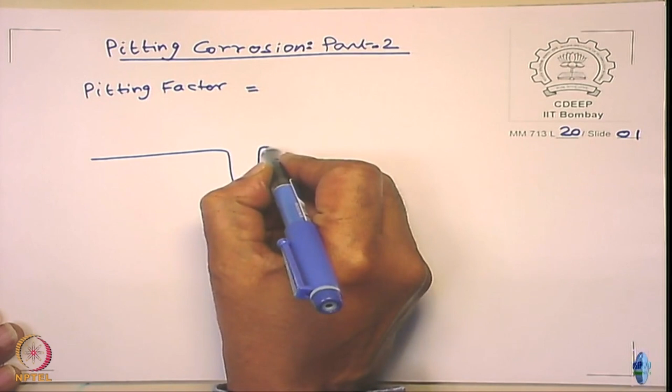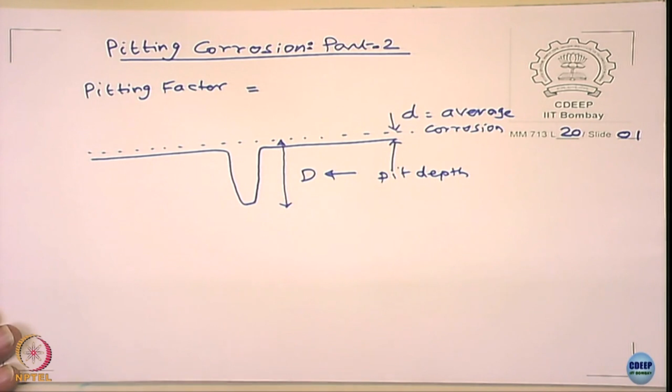The pitting factor is given by, and before I do this, I draw this diagram of corrosion leading to pitting. This is a pit you see here, and there is also uniform corrosion occurring on the metal. This is the average corrosion depth, d. Uniform corrosion you may call it. And this is the depth over which the pit has occurred, D. This is the pit depth. Now the pitting factor is given as D upon d. So it should be greater than 1.

Then you call it pitting. If it is not greater than 1, you do not call it pitting. The other way of defining pitting is the depth of a pit upon the radius. When I say radius, it is a gross radius.

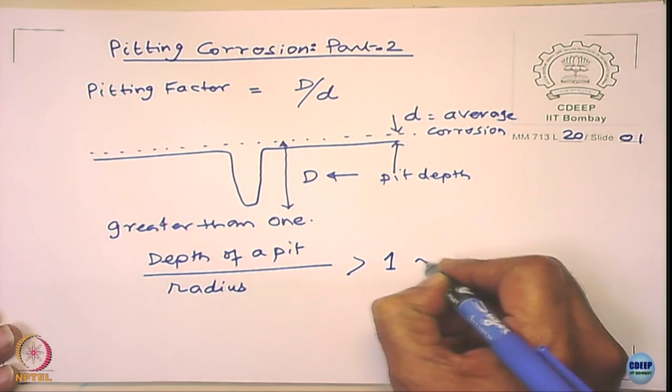You are not going to have a perfect circle, right? Perfect hemispherical, this thing. I think some people define it should be greater than 1, some people call it 2. So if you have a very shallow kind of thing, then it is not a pit. Now this makes sense, right?

If the pit radius is very large and the depth of the pit is very small, what happens? Can you connect it to the mechanism? It is not crevice corrosion. The migration becomes much easier, right? It is no more diffusion control and you can subject it to convection, right? If it is so shallow, the metal will just get out of the pit. It will not sustain a pit chemistry, right? So this is to sustain a pit chemistry, so that the pit becomes very stable.

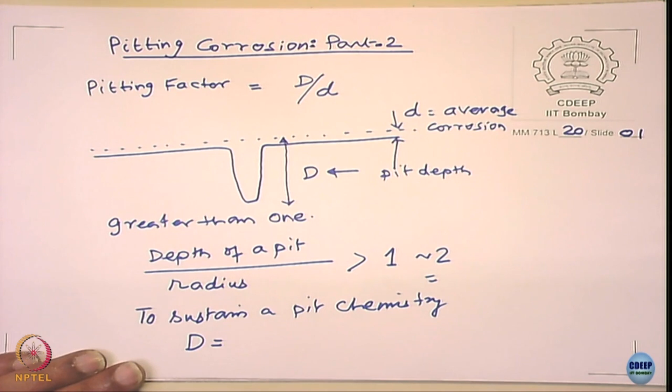People also have been following the pitting kinetics of various metals, and some people have come to this kind of relationship: the pit depth d is related to K times T to the cube root. D means the depth of the pit, right, and K depends upon the environment.

Please understand, this is related to growth rate, it is not related to pit initiation. The pit initiation may take weeks, it may take a month, it may take a year, whatever, but this only talks about the pit growth, it does not talk about pit initiation. What is T here? The T corresponds to the time of exposure.

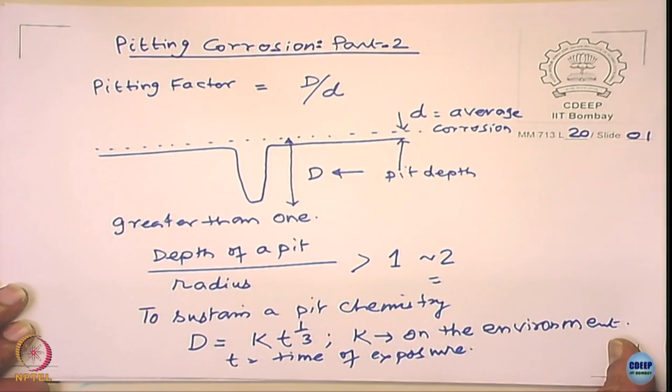It is necessary to understand that a pit is not only one shape, you can have complex shapes, you can have different morphologies of the pits. So it is necessary to recognize that. So we see that there can be different morphologies of the pit, and if you want to know more details, you can look at the standard ASTM G46. It talks about identification and examination of the pits. It talks about various pit morphologies.

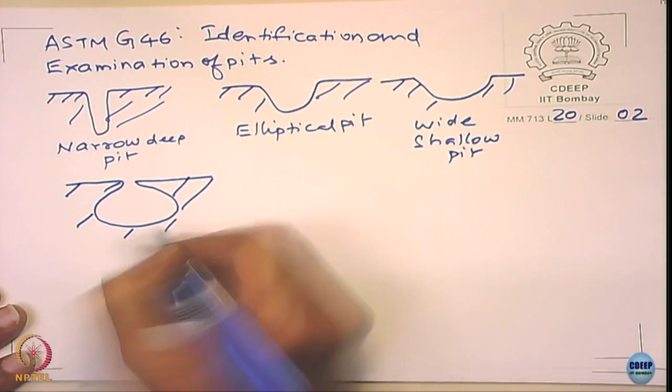I just reproduce some of them here schematically, right. You will have what is called a narrow, deep pit. You can have an elliptical pit. You can also have a wide, shallow pit. You can have pits which are subsurface. You see here, it just undercuts, just subsurface pits.

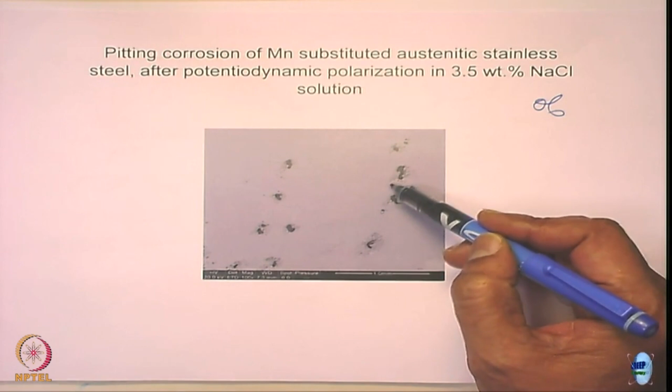Internally it grows like that, and there are some. Let me see if I have some photos. Yeah, there are some examples of how it goes. I suppose you will be able to see this. This is a pit here, and the pit has grown sideways, and from the bottom it starts corroding up, and so you see the pits here, very fine pits. So you see a small corrosion, and there is a lateral corrosion taking place, right, and from the bottom it just starts corroding, ultimately leading to this kind of morphologies. You see, this kind of thing could happen in the systems.

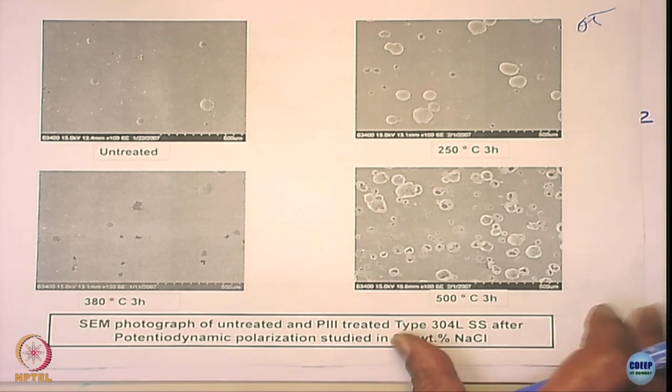You also see similar things here. These are all corroded and then lifted. See, this is about to lift here, just about to lift here. So these are the portions, I hope you are able to see this here. Look at this, it is corroded from the bottom and moves up and then it just goes away. So you can have very complicated pit morphologies, it can happen. You can also have sometimes very strange undercutting, something like that.

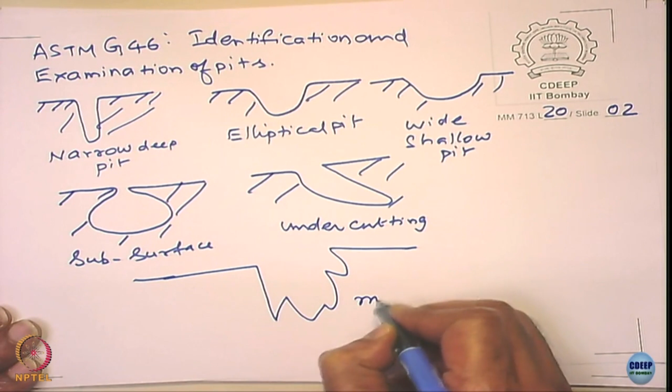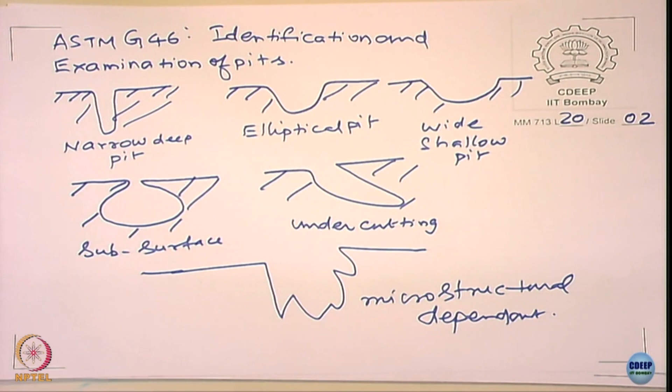So you can have nice hemispherical pits and you can have complex shaped pits depending upon the alloy, because an alloy is not homogeneous all the time. It could be chemically heterogeneous, and so there can be uneven types of corrosion morphologies for pits. Now, let us look at the factors that control pitting corrosion, because if you understand the factors controlling pitting corrosion, then you are able to prevent pitting corrosion. Broadly, I would like to say that there are two kinds of factors, one related to the environment, and the second one related more to the metallurgy. Let us look at these factors briefly. Let us look at the environment.

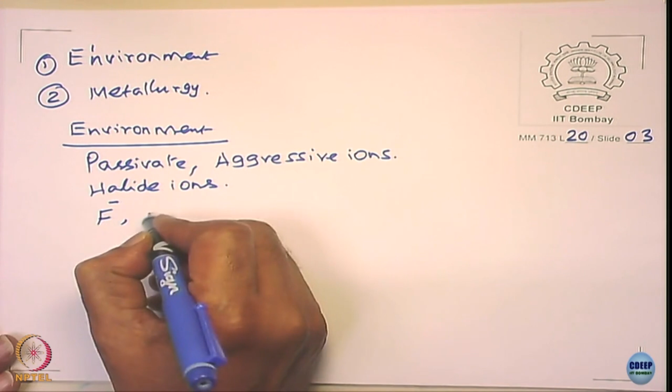We have seen the condition is you should passivate, right. Should have aggressive ions. Mostly the halide ions are considered to be aggressive. What are these halide ions? Anybody remember? What are they? They are fluorides, chlorides, bromides, and iodides.

When it comes to stainless steels, the most aggressive is chloride, next is bromide, and the fluoride and iodide, they are not really that aggressive. Okay. Now, broadly speaking, I would say, okay, not really actually, one can verify all these parameters.

Fluoride, see, if you have a passive film, if the passive film has to get damaged by these ions, the ions have to migrate in the passive films, right. They have to migrate and then form a complex. The migration depends upon what? The radius of the ions. If the radius of the ions is too big, then migration becomes very difficult. So if you take it that way, fluoride ionic radius should be smallest as compared to chloride and bromide and iodide, but even then the fluoride does not cause severe pitting as compared to chloride for two reasons.

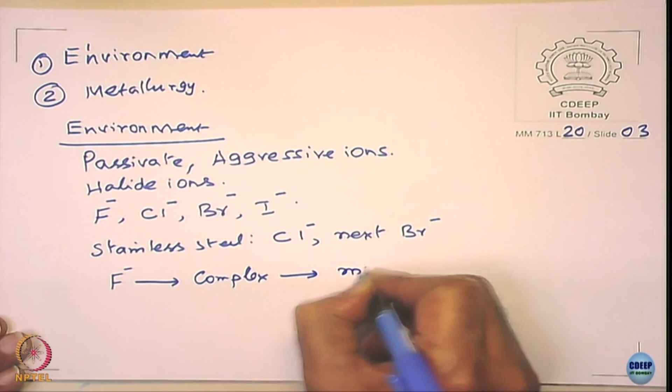One, the fluoride forms complex and so promotes more uniform dissolution. The second reason is the fluoride forms strong hydrated layers.

See, these ions in water are not very free, they are hydrated. The water molecules, I mean these ions are enveloped by the water molecules. Even if you take H plus ion, they are not free. H plus ions are covered with what? Covered with water molecules. Why? Water is a polar molecule, it has got a positive charge and negative charge, and so they get enveloped.

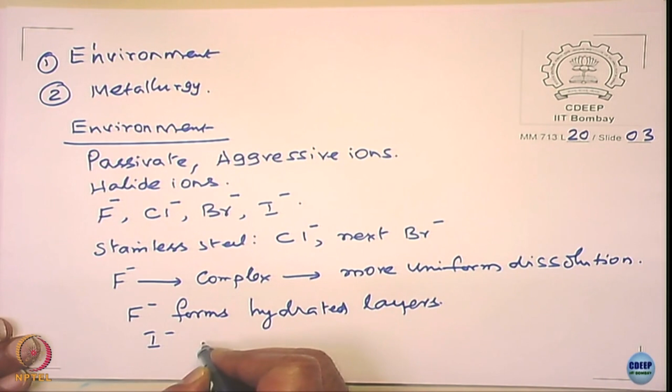So when you have a fluoride, it is getting hydrated, it's very strongly hydrated, then you do not allow the water to come out and free the fluoride ions, because to remove the water molecule from the fluoride ions is more difficult because the charge density is more on fluoride as compared to the chloride. So the two reasons make the fluorides less aggressive towards pitting as compared to the chlorides. And iodide is the largest radius. So it does not pit. Does not cause pitting rather actually, okay.

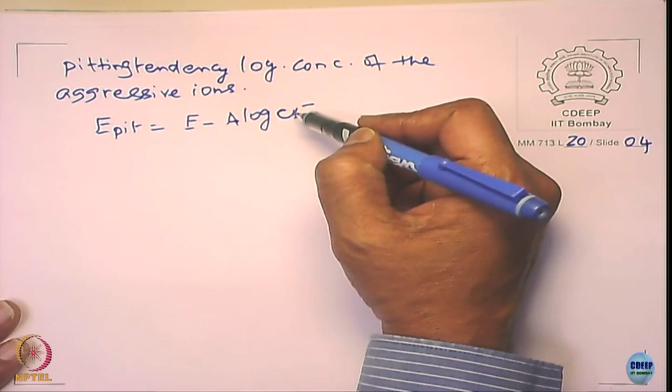Now there is a kind of empirical or thumb rule that the pitting tendency is logarithmically related to the concentration of the aggressive ions. Something like you can say E pit is equal to E minus A log chloride. So the E pit will decrease if you increase the chloride ion concentrations. A, this factor depends upon the nature of the aggressive ions. So higher the concentration of chlorides, the more susceptible they are towards pitting.

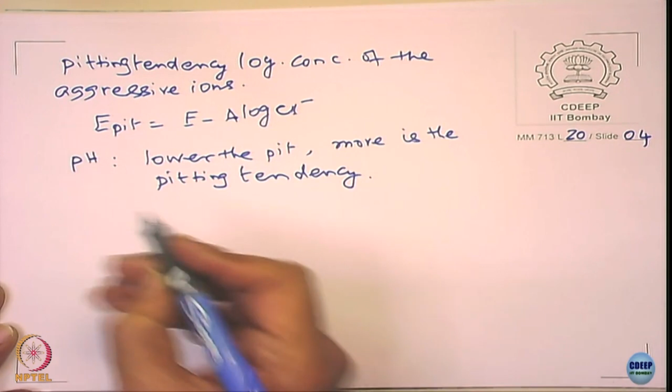It also depends upon the pH. Okay, lower the pH, more is the pitting tendency. What happens now, it's easy for the pit to stabilize in an acidic pH, right? You have H plus ions in the solution. You also have one more thing, that is the nature of the cations.

Can you remember some time back I gave an empirical relationship that E pit is a function of what? Function of chlorides, time, and of course the applied potentials, right. The pitting tendency, I said that is a function of applied potentials, concentration of the species, and time of immersion, right. Now, when I add ferric chloride, what happens? What do you think will happen? Any idea?

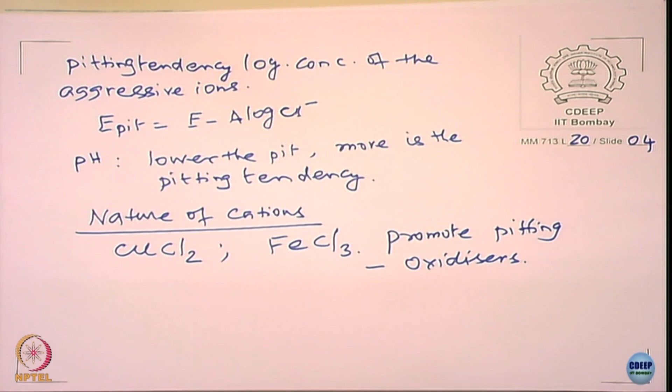On the other hand, suppose I add, let us say, sodium chloride or nickel chloride, they are not really going to change the electrode potential of the corroding metal. They may not have very significant effect on pitting corrosion.

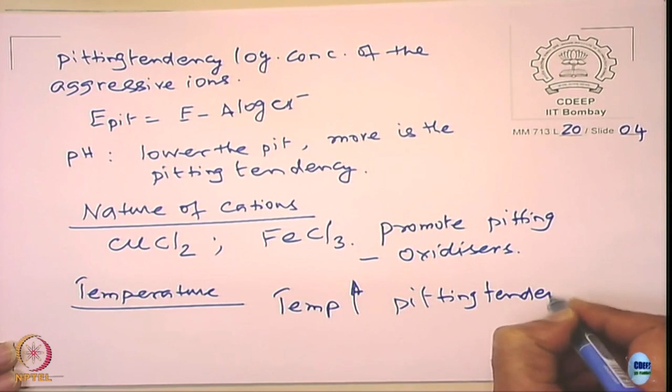So, what about the temperatures? What do you think will happen to pitting corrosion when the temperature increases? Diffusion will become faster, what more can happen actually? That is only one aspect of it. What also happens to the dissolution of the metal ion at the pit? Increase, right? So, when the temperature is increased, pitting tendency also increases. In fact, they also make some of the salts, formation of salts, and then it stabilizes the lower pH and stabilizes the chlorides. So, rise in temperature is always detrimental towards pitting corrosion.

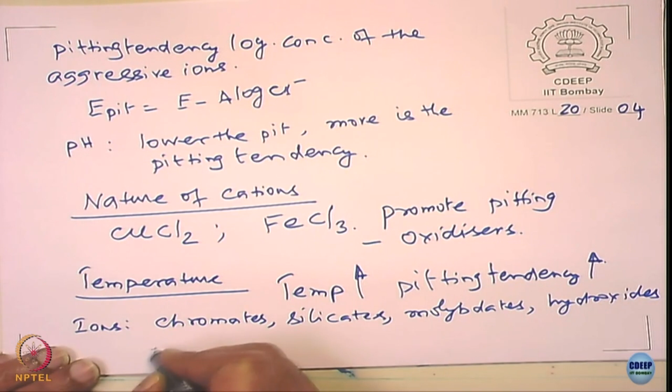Now, some of these ions, say chromates, silicates, molybdates, and even hydroxides, they inhibit pitting corrosion. In fact, for aluminum alloys, to improve the pitting tendency, they give conversion coatings. They give conversion coating with chromates. Okay, the chromates indeed promote resistance against pitting corrosion of aluminum alloys.

Let us look at the metallurgy. Here we are not going to look at a host of materials, say titanium undergoes pitting and almost all passive metals will undergo pitting, given the conditions. So we will just confine mostly towards stainless steels, very broadly used actually. So let us look at the metallurgical aspect of it. When I say metallurgy, we say the composition, one aspect, 2, the microstructure, right. You can also talk about the surface nature. It is not really metallurgy that way, surface nature. Now let us take the case of stainless steels and discuss these aspects in detail, because stainless steels are very widely used and they are prone to pitting corrosion.

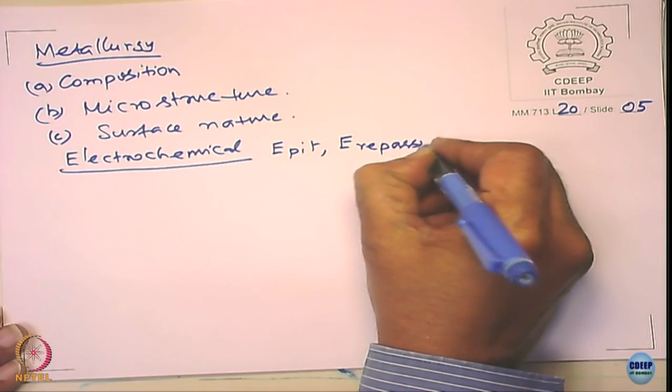Now the pitting tendency of the metal you could define by some electrochemical parameters, right. What are the parameters? Anybody recollect? What are the parameters that you can use to measure the relative resistance of an alloy to pitting? Pitting potential. Pitting potentials. And the other one is called repassivation potentials. Now let us look at how various alloying elements affect these two properties.

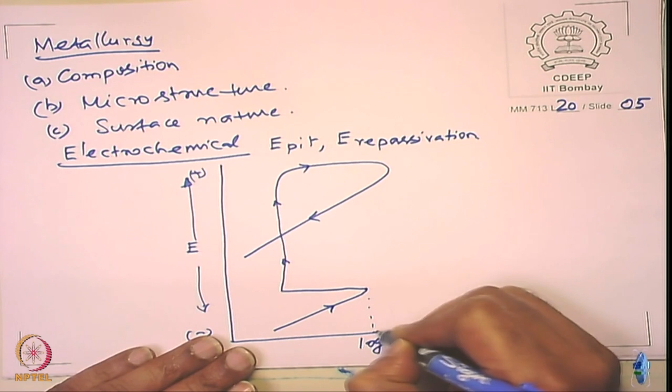So schematically, this is the forward scan, backward scan, right. From the corrosion potential, you raise the potential, and what is this called? This is called, what do you call this current density? I critical, critical current density. And what is this called? I passive. And what is this one? E pit. And this is called E repassivation potential.

Now let us look at the elements that can affect this. The elements that move up the E pit are going to improve the pitting resistance of the stainless steels. So what are these elements? These elements are chromium, molybdenum, nitrogen, tungsten, silicon, vanadium and nickel. So these elements, they increase the pitting potentials. So when you increase the pitting potential, that means the initiation tendency of the metal to pit is reduced. What about this? If it goes up, it is good. This is called repassivation potential.

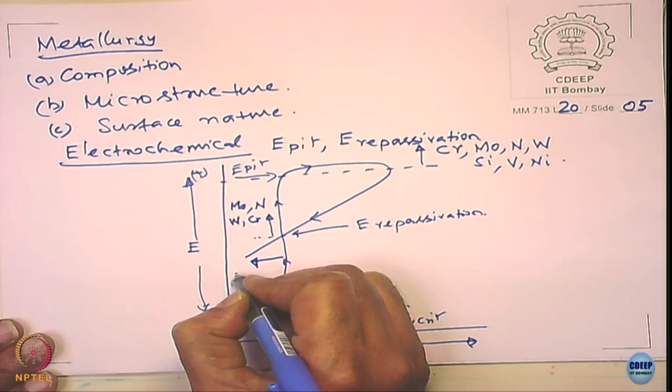If it goes up, these things you have molybdenum, nitrogen, tungsten and chromium. Of course, you want to know about the passive current density, whether you want this to be reduced or not. The passive current density is reduced by these elements: chromium, nickel, tungsten and nitrogen to a certain extent. And you want to know about this one, what is this potential called? E primary passive potential, right. What are the factors that affect this? See, nickel is not good, it increases, and so does copper, it increases. Which ones decrease this I critical? Now these elements like chromium, nickel, vanadium, moly and nitrogen. So in fact this forms a basis for development of various types of stainless steels, which are resistant to corrosion in general, pitting corrosion in particular, crevice corrosion in particular, and this forms the basis of that.

Of course, you cannot keep adding the way you want. Suppose I take an austenitic stainless steel, I want to increase the pitting resistance, I cannot keep adding so much chromium, right. If you add it, what happens? The austenitic phase will turn into a ferritic phase. So then you need to make a phase balance, so you need to add nickel to it, right. So the alloy development is a different story altogether, but the corrosion resistance story depends on this diagram, and in order to get different phases you compensate with the relevant alloying elements. So that is a different story of physical metallurgy of stainless steels, we will not be discussing over here.

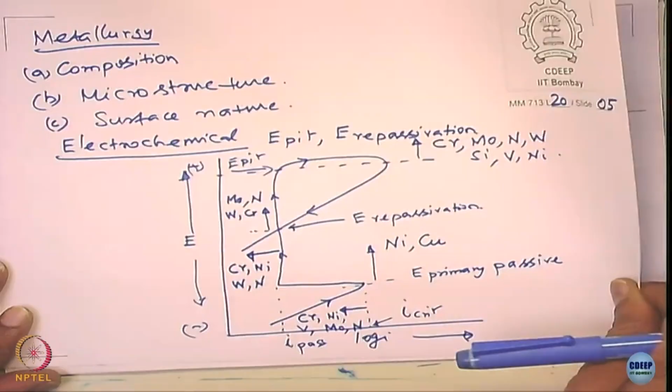Now if you look at here, there is also an empirical equation to correlate alloy chemistry to pitting corrosion, that is using PREN. It is an index which is given as percentage of chromium plus 3.3 times percentage of molybdenum, plus 0.5 of tungsten plus 16 times percentage of nitrogen. What is PREN? It is called the pitting resistance equivalent number.

Okay, and you can say that if PREN increases, pitting resistance increases. So for applications involving large amounts of chlorides, like seawater applications, stainless steels with a higher PREN are being developed. Some of them, in fact, are in use, okay.

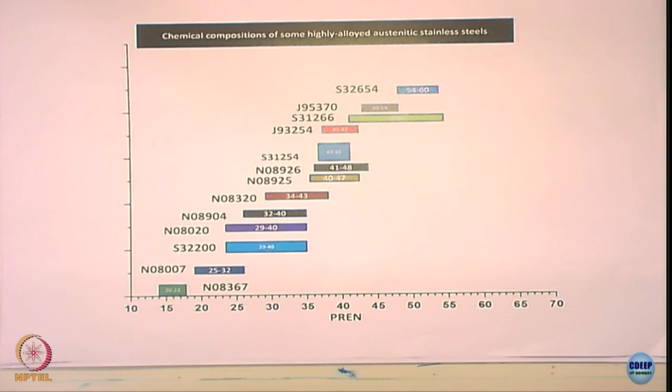Now I give some example here. I hope you are able to see this chart here. It represents various austenitic grade stainless steels. You can use this kind of thing for ferritic grades also. What is given here is the PREN number, starting from let us say 15 and going up to let us say 60, okay, and you see the stainless steels have been developed starting from here up to this, right.

This is called the 654 SMO, okay. This has 6 molybdenum, a higher amount of molybdenum is present here. Now you cannot add a high amount of molybdenum because it becomes a ferritic stabilizer, so people add more nickel to that. So this is also, you have 254 SMO, and 25 chromium you have actually, okay, and so various kinds of stainless steels are being developed

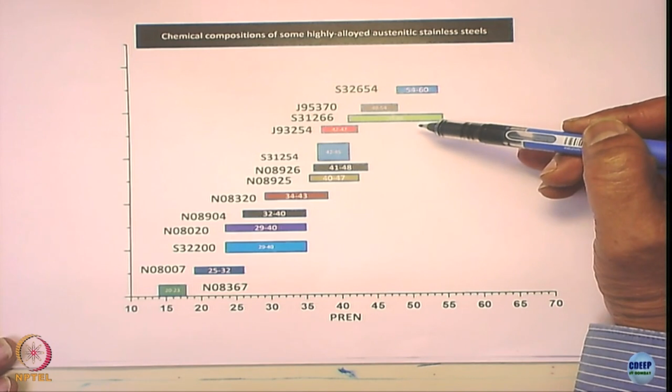in order to have higher pitting resistance, which means they do have a higher PREN number, but the cost of this is also going to go high, right. You have more nickel, more molybdenum, which really increases the cost. So that is one of the problems of using austenitic grade stainless steels. So what happened was that there is a variation of this. People use what are called duplex grade stainless steels. It's somewhere in between, and nickel based alloys also have very high pitting resistance. Now the cost of duplex stainless steels at high PREN number is lower compared to the cost of austenitic stainless steels at high PREN number.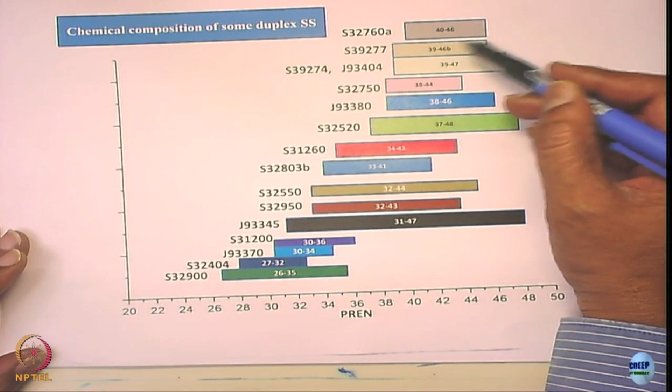The reason is very simple. The nickel content in duplex stainless steels is mostly lower compared to the nickel content in the austenitic grade stainless steels. So again there is a gradual growth of duplex stainless steels with low PREN number going up to 40, 46 and so on. Now look at this, duplex stainless steel can be used in seawater application where the chloride content is 3.5%. Similarly, you can also use 654 SMO, okay, but this material is prohibitively expensive compared to the duplex stainless steel here, okay.

So what I am trying to say is that the development of stainless steels was based on understanding the chemistry of the alloy towards the pitting corrosion of the metals actually. In all this, nitrogen plays a very significant role. Let me just see if I can show you some kind of curves here.

Let me show this polarization curve, okay. Essentially it's a 904L filler wire, you know what is called a cladding, right? What is a cladding? You melt and deposit. You can also deposit without melting, right? It's a layer, in this case 904L, formed on mild steel here, okay. This is done by welding, by weld cladding. So you melt it and apply on the mild steel, and it's 904L, okay.

So what happens? See, in this case the carbon steel, why do people go for cladding? Because you want higher corrosion resistance materials, you want a thick one, and it's very expensive, right. So you can go for a carbon steel or other steel having lower cost, go for a thicker component, and just deposit a clad layer of let us say 2 or 3 millimeters that takes care of the corrosion, and the basic substrate takes care of the strength characteristics, so it becomes cheaper.

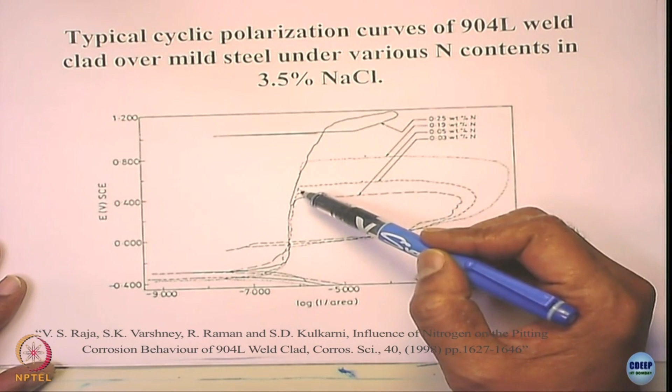Now we have done some work related to 904L, okay. Look at this here, it starts with this, the 904L without adding any nitrogen. When you start adding nitrogen further and further, you see what happens: the pitting potential increases and even the repassivation potential also increases. Now in this case the nitrogen content is 0.25. So when you add more nitrogen to the weld, the pitting resistance increases significantly. Please see here the weight percent is about 0.25% only, it's not too much.

So by adding this nitrogen you can increase pitting resistance, the E-pit value, from 400 millivolt up to 1.2 volt. In fact 1.2 volt means it is not pitting actually. If you look at the Pourbaix diagram, it will be the oxygen evolution reaction. Okay. So essentially this does not pit at all by just the addition of a small amount of nitrogen. So alloy development can be done to improve the pitting performance of stainless steels.

Pitting corrosion is also very widely studied from the mechanistic point of view. What I mean by that? When you add molybdenum or nitrogen, they are much more effective as compared to chromium actually. So people have studied why molybdenum is very effective, and why nitrogen is very effective, because there is no last word, right? Still there are multiple theories as to why molybdenum and nitrogen improve pitting resistance. I will just summarize a few of them and then move on to the next topic.

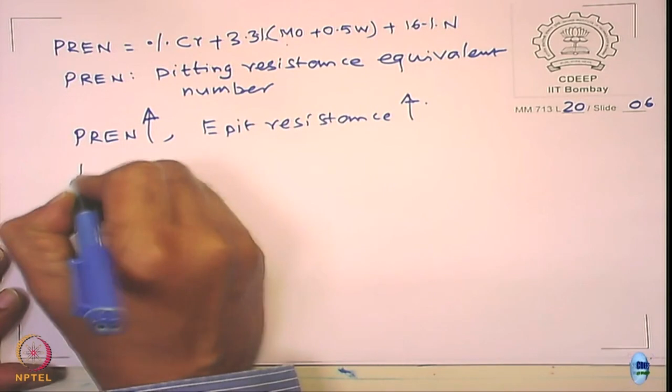The role of molybdenum has been, first of all, they say that molybdenum is not found in the passive film. It is found in the actively corroding areas. So suppose you have a pit, in the deep of the pit you can find molybdenum, or you keep the metal in the active region, and then you observe the surface will have more molybdenum. But in the passive region, the passive film, there is no molybdenum at all. So this led to some understanding that molybdenum blocks the active surfaces. One kind of hypothesis.

There is also another hypothesis which says that the corrosion rate decreases when H plus concentration increases. It is a very unique property of molybdenum actually, right? You saw before, when the pH of the environment decreases, what happens to corrosion rate? It increases, right? But molybdenum has different characteristics. When you increase the acid concentration, the corrosion rate of molybdenum decreases. This is called a negative reaction order. Suppose you have molybdenum on the surface, and you increase the acid concentration, it is not going to corrode. Why? Because molybdenum has a negative reaction rate order, and so this is considered as another factor.

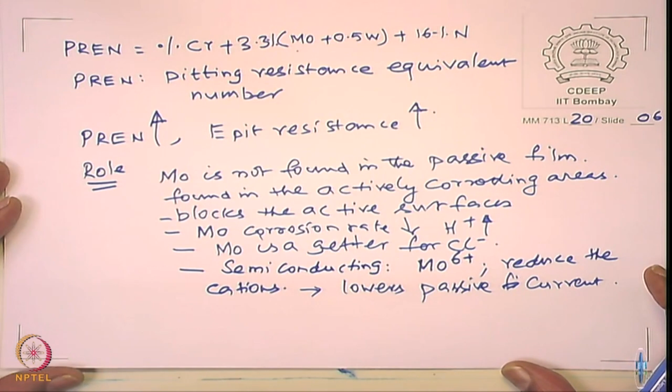There are also other theories that talk about semiconducting behavior. The passive film is considered as a semiconductor, right? It is like high temperature oxidation. You have an oxide film, it is considered as either rich in oxygen or less in oxygen, non-stoichiometric oxygen there, right? Then you have either p-type or n-type oxide conductors. So similarly, you can also consider the passive film as a semiconductor, and what happens when you add molybdenum, let us say in the 6 plus valency state? It will reduce the cations, right. When you add higher valent ions in the oxide, the cation concentration decreases to maintain electron neutrality, and so what happens? It lowers the passive current and makes it stable. So there are several theories available. I have given only a few of them, and there are some more theories. For this course we do not have to worry too much about the mechanism, just an outline of the mechanisms is okay.

Nitrogen has a similar role. About nitrogen, it is still not clear. Some people say it forms ammonia, that means it neutralizes. But what we have seen is that the active dissolution is reduced due to nitrogen in the alloy.

Now we also have the microstructures. Let us go to microstructures. Suppose you have some phases which are selectively corroding, like manganese sulfide, what happens? It lowers pitting resistance. They selectively dissolve, attack actually. So any phase which is prone to corrosion will promote the corrosion. Similarly, segregation of elements promotes pitting.

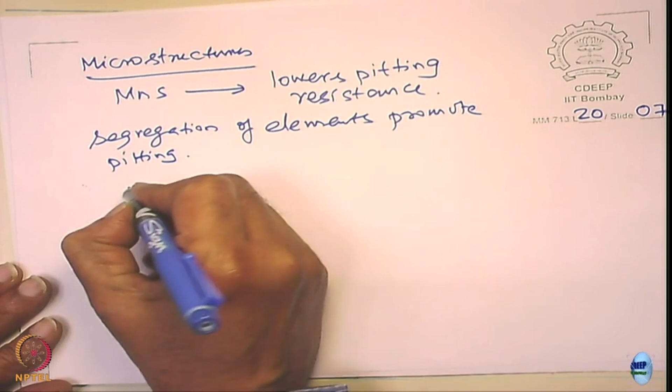I give an example. You weld it. What has happened to the material when you weld it? The weld fusion zone, what happens? Some of you are having a metallurgy background, right? When you weld by, let us say, fusion welding, TIG welding or MIG welding, you take a stainless steel and weld, what will happen? If you look at the microstructure, what do you see as the difference between the welded fusion zone and the base metal? I am talking about the fusion zone.

You take a nicely rolled wrought stainless steel sheet and you weld it, and the fusion zone, what do you get? What structure is that? Have you heard of a cast structure and wrought structure? What kind of structure will you have in a casting? Suppose you melt and pour it. What structure do you get in a casting? Dendritic structure. You see, they are very simple, right?

Normally all your stainless steel, you have a molten liquid, pour it, and then they do hot rolling and then anneal it out, they make it chemically homogeneous. But when you weld it, you are going to have elements which segregate. Of course, we do not have time to discuss those issues. The welds will have chemical segregations, like segregation of chromium, molybdenum and things like that. So, you have some place which is enriched with chromium, some place it is depleted of chromium.

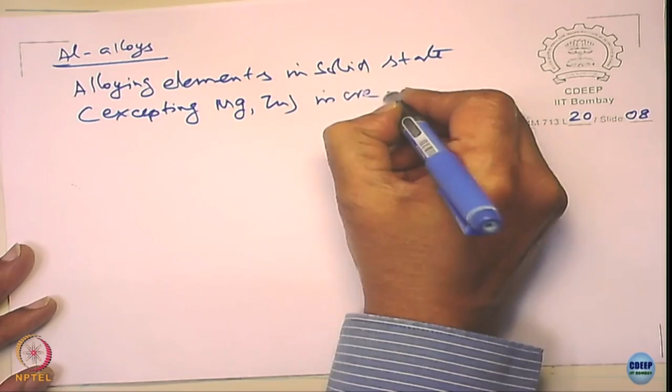The other example, let us say I just give a small example, is aluminum alloys. That is a very nice system to discuss, and how the pitting resistance of the aluminum alloys really changes. The aluminum, unlike stainless steel, will have multiple phases to have the strength, right. In aluminum alloys, alloying elements in solid state, that is excepting magnesium and zinc, increase EPIT.

So, they are generally good, but you do not make aluminum alloys generally with the elements in the solid solution. You always want to have precipitates to increase the strength performance actually, but from a scientific point of view, you can add so many elements like molybdenum, tungsten, chromium and a host of elements. If you can put them in the solid solution, you will find a very significant improvement in the pitting resistance of these alloys actually.

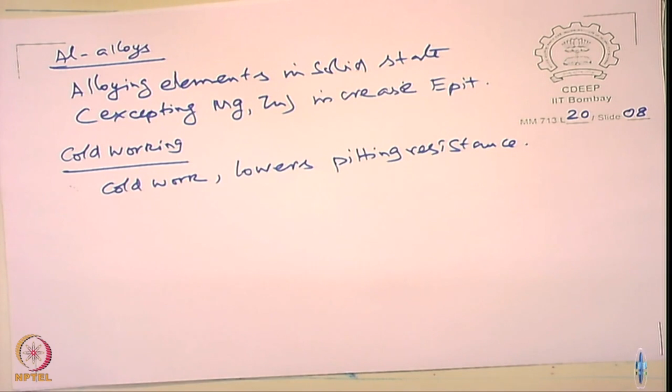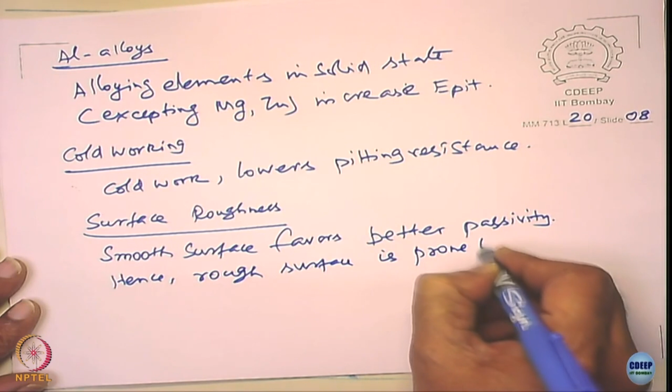Okay. Let us look at the other one, metallurgy, cold working. Generally cold work, what happens? It lowers resistance. Why? It introduces dislocations, and so there will be more corrosion. Surface roughness, okay. Smooth surface favors better passivity. Hence, rough surface is prone to pitting. So, if you do electro polishing and make it mirror like, you have excellent resistance to pitting actually.

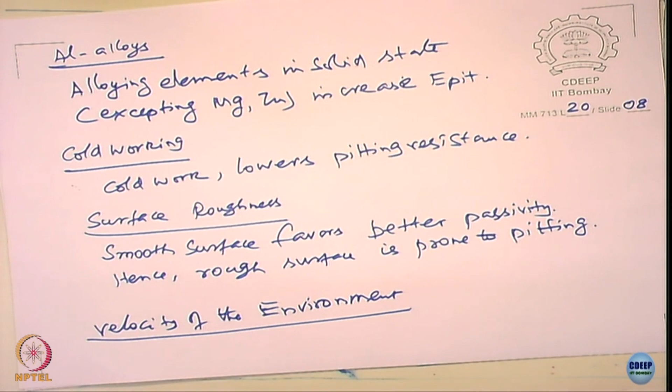One of the external factors, not related to metallurgy, is velocity of the environment. So, what do you think will happen to pitting corrosion? You have a stagnant condition, you have a flow condition, what will happen to pitting corrosion? Pitting resistance will increase, okay. Why does it increase? Because it will destabilize the pit chemistry, right? The pit chemistry is destabilized. Hence it increases pitting resistance.

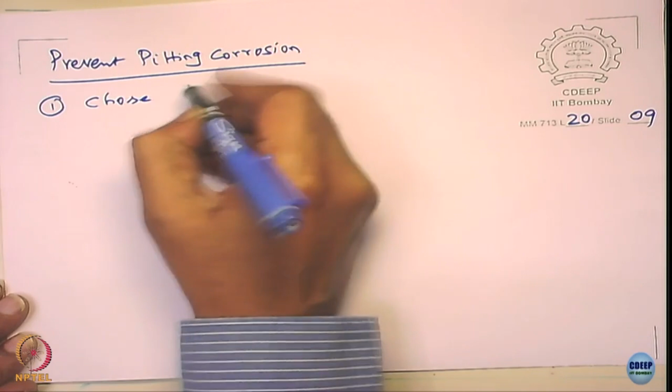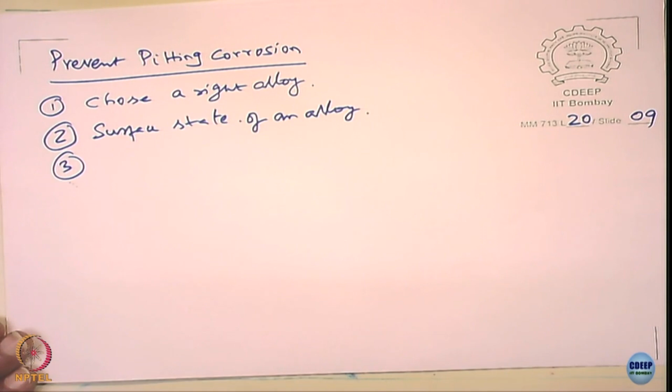So we have seen overall the factors that are controlling the pitting corrosion. Then it must be easy for you to suggest methods to prevent pitting corrosion. How do I avoid pitting corrosion? Quickly, yeah. So you can choose a right alloy. Or you can change the surface state. To some extent, it is not going to be okay for long run, but yes, it is good. Third, environment change where possible.

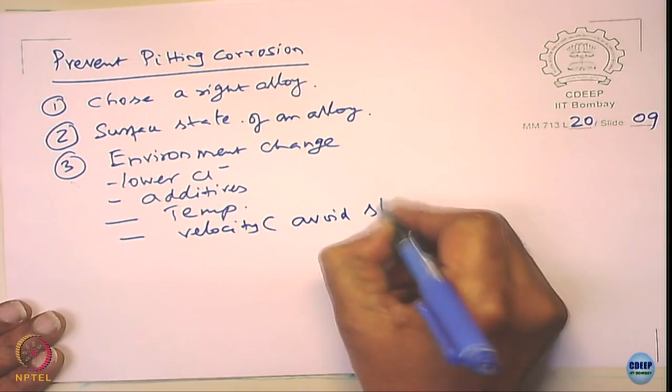If you are going to apply a material for seawater application, obviously you have to choose a right alloy, right? You cannot really do much about it. But if you are talking about a cooling water system or a boiler water system, you can change the environment, right? You can lower chlorides, add additives, change the temperatures. Then velocity, that means avoid stagnancy, right? If you are going to talk about seawater application, one of the very robust alloy systems is what? Titanium, right? Titanium forms a very strong passive film, and so it is more resistant to pitting corrosion. You have of course tantalum, the ultimate in terms of corrosion resistance and pitting resistance.

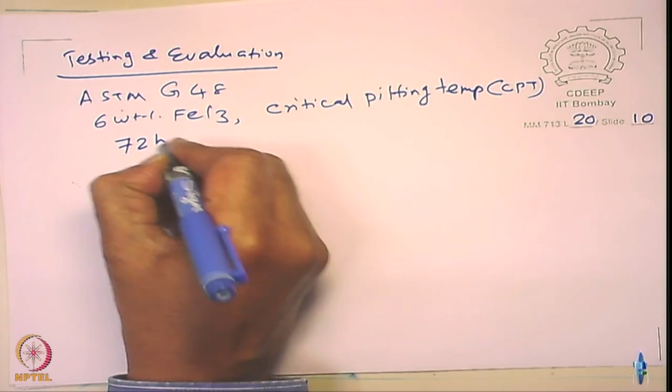Okay, so let us go to the last topic of this, which is testing and evaluation. There are ASTM standards for that, you can look at them. In ASTM G48, this talks about the 6% ferric chloride solution. It determines the critical pitting temperature. What you do in this case is you immerse it for about 72 hours, maintain the temperature plus or minus 2 degrees accurate, and find out the highest temperature below which no pitting occurs. That is called the critical pitting temperature.

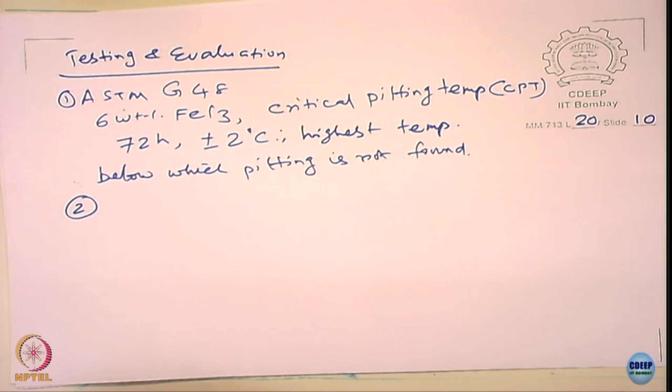Pitting is not found. The second one is also ASTM G61. It is cyclic polarization. What you do here, you determine E pit, you determine the E repassivation potentials essentially, right.

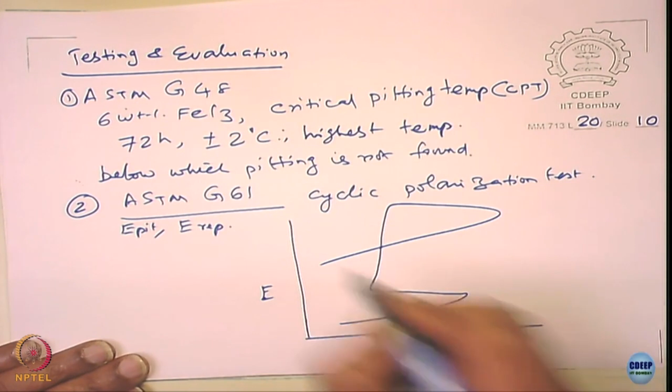I am not going to give you all these details, you can read this in the standard, it is available in the library. I will tell you what is important here. One is the scan rate. Higher the scan rate, you get higher pit values. So you have to maintain the scan rate as stated in the standard, 0.6 volt per hour.

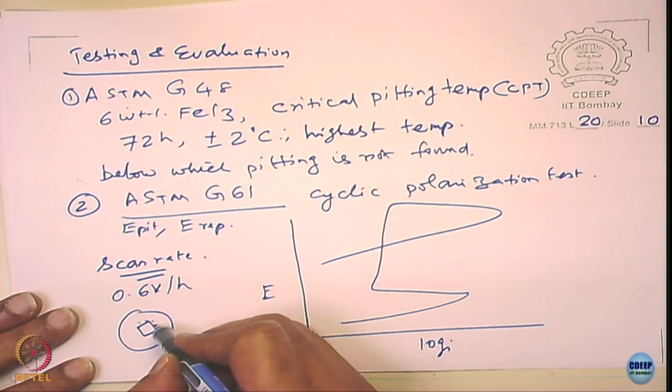There are some problems you normally encounter. If you do 0.6 volt per hour, sometimes you will get a crevice attack in the samples. You know, sample sometimes you mount it. You have a mount here, you keep the sample, and you may get a crevice attack. You must ensure that there is no crevice attack taking place. If there is a crevice attack, then E pit will be lower than the actual value. Why? Before pit occurs, the attack takes place along the interface here. So mounting the sample properly, ensuring that no attack occurs at the interface between the sample and the mount, is a very important thing.

In our lab, we apply a small bead of epoxy resin, so that the interface is protected. There are also special electrochemical cells available. I think we will not discuss that here. You can see them in the literature actually. What is more important is that this reversal current, what we talk about here, is 5 milliamperes per centimeter square.

Now, if this is not maintained, for example, if I just scan like that and reverse it here, you get like this. If, on the other hand, I reduce this current even more, I get like this. So this repassivation potential ERP, whatever you write here, depends not just on the material, it depends upon at what current density you are reversing the scan, right. I hope you will be able to understand why it takes place.

If you apply more current, the pit becomes deeper, it becomes difficult to repassivate. If the current is lower, the pit is shallow, it is easy to repassivate. So repassivation of the pit does not depend only on the metal, but also depends upon the depth of the pit. But what they have found here is, if you apply 5 milliamperes and above, it is not going to depend upon this current.

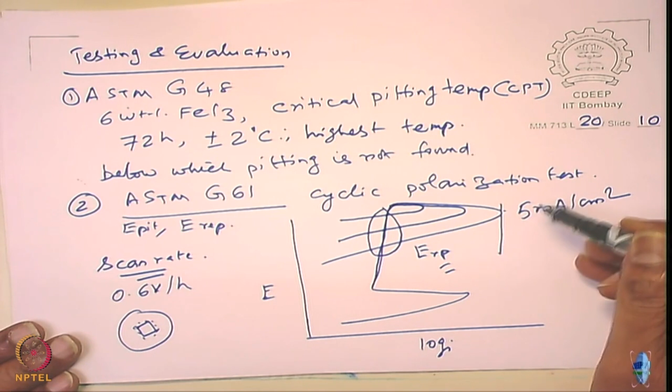In fact, work was done at Southwest Research Institute by Narasi Sridhar and group, where they have shown that there is a critical pit depth beyond which it is not going to affect the repassivation potential. So that means you need to follow this standard meticulously, without which you may get a different ERP value, which is not an indication of the pitting growth resistance tendency of the metal actually. Please look at this, this talks about pitting initiation, and this talks about the pitting repassivation here. Now look at this, this is called a hysteresis, right.

When you do this, I think we discussed earlier in the earlier class, did we discuss this one or not? Did we discuss this one? No. Okay, so then I will spend a minute on this to discuss what it is, so that you will understand it better.

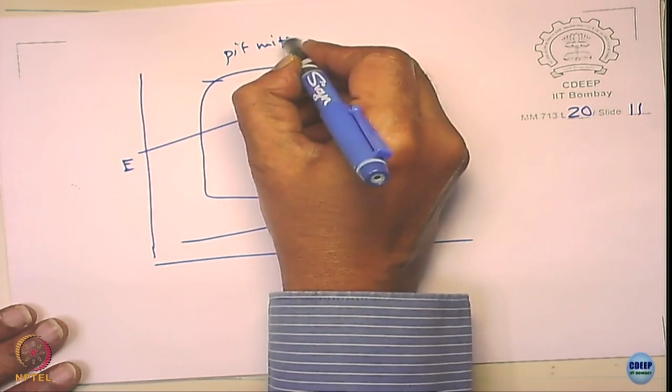See, here you can say the pit is initiated. When you advance the potential more and more, what happens? Here new pits initiate, old pits grow, isn't it? So here it becomes a stable pit, right? So beyond this, what happens? The pit that is formed here is stable, but when you start increasing the current further, which means you are going to increase the potential also, now what happens? The new pits are going to form, the old pits grow.

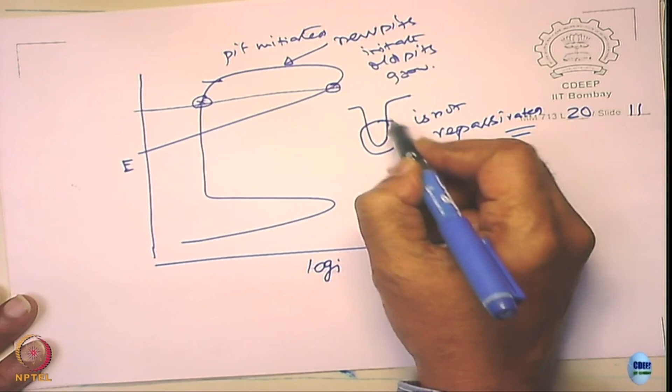Now what is happening when you reverse this current here? Please see this. It is not following the same path. Rather, the reverse current is higher than the forward current, right? Why does it happen? It happens because when a pit is formed here, this pit is not repassivated. The pit continues to corrode. Even though you are bringing the potential below the pit potential, the pit continues to grow because the pit is now seeing higher chloride ions, it is seeing a higher amount of H plus ions, and the film is totally damaged, it is not healing at all.

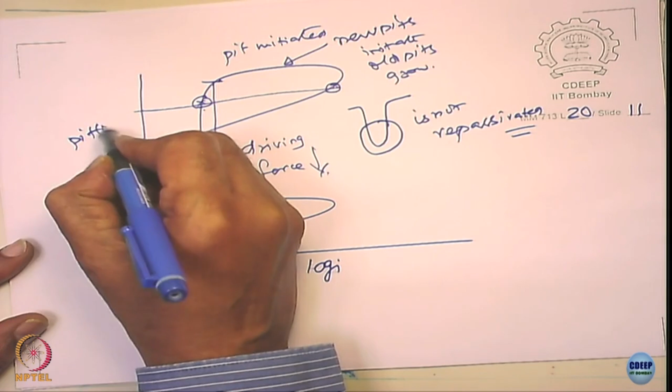So when you bring down the potential from here to this, what is happening now? The driving force is decreasing. The overvoltage for the metal to dissolve is decreasing here. So now the dissolution current keeps decreasing here. At this particular point of time, we can say the pit is stopped.

The walls become passive now. Okay, so that's what really happens now. So that is why this is called a repassivation potential now.

So we look at the two types of testing for pitting. One is ASTM G48, wherein you use ferric chloride and determine the critical pitting temperatures, and we also use that particular test to quantify the pitting on scales. If you go through this standard, the standard gives you a lot of view graphs to quantify the scales based on the number or based on the depth, based on the radius of that.

We also looked at the electrochemical test where we use cyclic polarization to determine the pitting potential and the repassivation potentials. These two are the important criteria in ranking stainless steel or any material against pitting corrosion in a given environment. Please again notice that the E-pit or E-repassivation potential also depends upon the environment, it does not depend only upon the material. So these two techniques are very widely used. Obviously, you can't use weight loss measurements to determine the pitting because the apparent weight loss is so insignificant, it does not give you any meaningful information about the pitting tendency of any alloys.

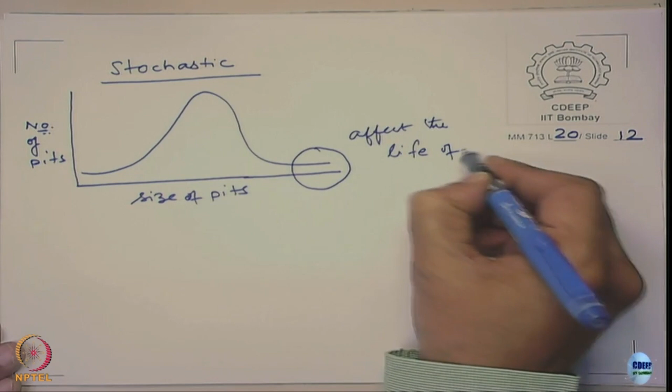What does it really indicate? If you count the number of pits on the lower size and the highest size, both sides are very small in number. The average size of pits are large in number. But if you talk about a component failure, what does it depend upon? Suppose you have a pipeline and it has suffered pitting and the leak occurs. The first leak that occurs, does it depend upon the number of pits? What does it depend upon? It depends upon the deepest pit. So in practice this is what is going to count for us. This is what is going to affect the life of a component. This looks a little more, even more simple.

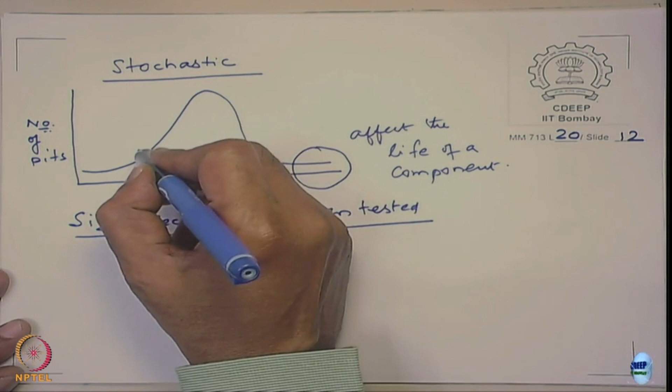Let us look at the size effect of the specimen tested. Does it really play a role? Now, in order to look at it, we take this as a probability concept here. The probability of occurrence of one size of the pit. For example, what is the probability of this pit occurring? We can also look at the probability of this one. So I can determine what are the probabilities of occurrence of a given size of the pit. I can do that. If I can expose the samples of various sizes and determine the probability of occurrence of any of these size pits,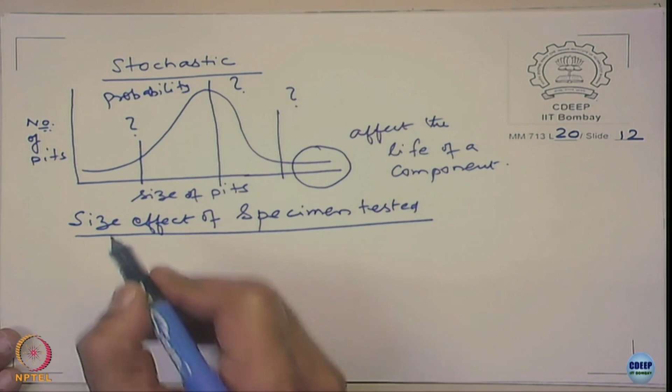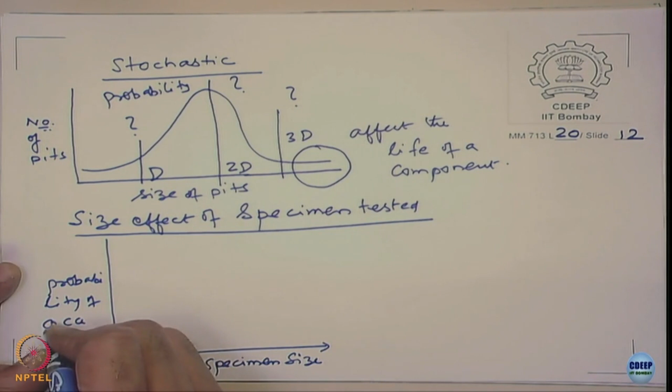I assume, let us say D is the size of the pit, let us say 2D is the size of the pit and 3D is the size of the pit. I am giving approximately. And if I plot the probability against specimen size, probability of occurrence of the pits, let us say 0 and you say 1 probability. And for simplicity, I also rate the size in terms of unit sizes. Let us say the size of the specimen is 1 unit area, then 2 unit area, 3 and 4, like that I can have. Unit 1, this is the 2, 3 and maybe you can say 4 or whatever, up to let us go up to 3 only.

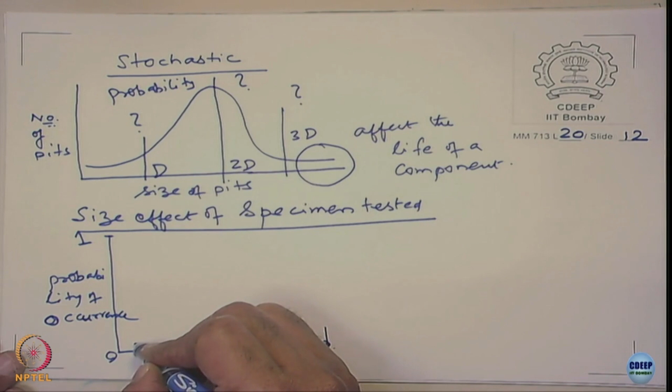So what do I mean by that? Suppose I take this is 1 centimeter square, this is 2 centimeter square, 3 centimeter square. Let me look at the probability of finding the pit of diameter D. It is very interesting that the probability of finding the pit D, the sample 1, goes like that. So the probability of finding that size of the pit increases when the size of the sample increases. Now I can also find out a similar thing for the pit size of 2D.

So what do you understand from these plots? If the size is increasing, the probability of finding deeper pits is more. So that means the structure is more in reality. If you are going to go for larger structures, the probability of pitting is going to be larger. The smaller the structure, the probability of pitting becomes less. So it is a stochastic process.

So in a laboratory, suppose you take a very small size of the sample and somebody takes a larger size sample, it is possible that you may get different results, not necessarily the same kind of results. So this makes things more complicated. There are several reasons one can attribute to that. Suppose I take a stainless steel. The stainless steel consists of what? Consists of inclusions, right. The probability of finding an inclusion which affects the pitting is more when the size of the sample is larger.

So this is one aspect, and people have in fact dealt with this; the probabilistic theory of pitting corrosion has been one of the important topics of research. We will not go into more detail on it. The idea is to expose to you the complexities involved in determining the pitting tendency of any sample. That is why when you do a corrosion test, you give all the information: size of the samples, environment, the duration, temperatures, because there are several factors that affect the corrosion behavior of the metal. So in this case, the size becomes even more important and relevant for us to consider. So that is something you should look at.

One thing I forgot to mention about the prevention of pitting corrosion. If you can go back to this slide, sometime back we discussed it. Please recall this discussion. I just want to add something. We said that pitting corrosion can be prevented by, of course, choosing the right alloy. Of course, that is a very generic way of talking about it. You also need to look at the surface state of the material, how polished it is, and the environmental changes: chloride should be reduced, you can add additives, you can lower the temperatures and you avoid stagnancy and all.

But of course, the material selection depends upon what? Depends upon a given environment, right. You know the temperature, you know the chlorides, you know the pH conditions, and so you decide what alloy is suitable for that. And for that you also have tests like critical pitting temperatures, EPIT values. Please again notice these are all rankings of the materials. I do not think that these tests are going to give you any kind of life that you can predict. That is simply not possible so far for the pitting corrosion of metals.

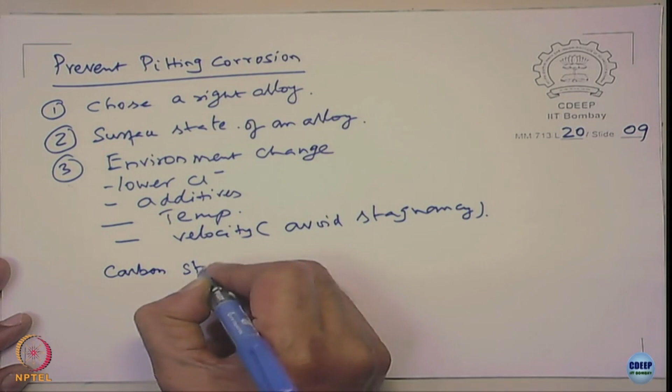Coming back to the first aspect, that is the choice of alloy, and when it comes to stainless steels, you know that you want to increase the pitting resistance. One way to look at it is the composition, which is the pitting resistance equivalent number. If it goes high, then the pitting resistance increases. But the other way of looking at it is you choose an alloy which is not passivating. For example, carbon steel is better than stainless steels for seawater applications.

That is why a ship hull is made up of what? Made up of carbon steels, right, not a stainless steel. But what is the problem with carbon steels? The uniform corrosion rate is more, right. The uniform corrosion rate is more than that of stainless steels. But if you have the problem of uniform corrosion, then you go for copper based alloys. What are the alloys that you can think of? You can think of brass, you can think of copper nickel alloys, right. They are all used in seawater applications.

They have reasonably good uniform corrosion resistance compared to carbon steels, and they do not pit, and so they are in fact widely used for seawater application. The other way of looking at it is you have very strong passivating metals and alloys, that is, we saw a PRE number. Similarly, you can look at titanium, zirconium, these all can be used.

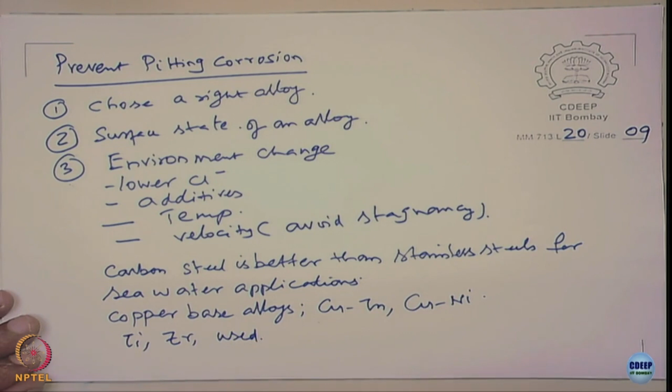Titanium is actually used for seawater application. Strong oxide films are formed at ambient and slightly elevated temperatures, so titanium can be used very well.

So to summarize pitting corrosion, the pitting corrosion occurs predominantly in passive metals. Only the pitting, I put it as a passive system. I know there are metals like titanium, stainless steels, and alloys which are passive in a very wide variety of environments.

But we also know that you can passivate many metals, depending upon the environment. You make the pH slightly favorable, and even steel can do it. Magnesium can undergo passivation, and in such cases they can undergo pitting. So it is the passive system. It also depends upon the environment,

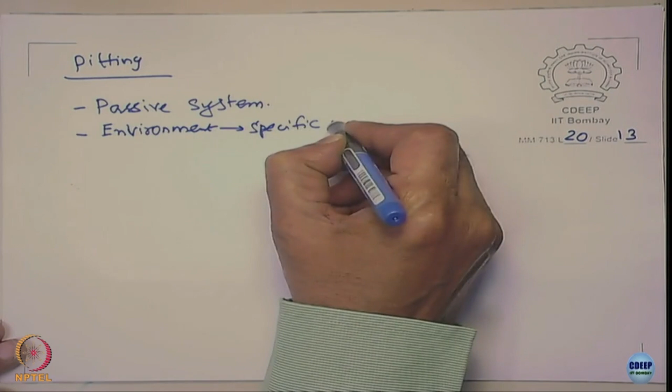specific anions. I specially put it. Of course, cations also can influence. Can cations influence pitting corrosion? Yes, cation accumulation, of course, is another part of it. But I am talking about the environment, not the cations dissolved in the pit and causing the pH change. I am talking about external addition of cations, if they are oxidizing agents. Yes, oxidizing agents: ferric ions, cupric ions, mercury chloride, all the highly oxidizing environments can cause pitting. Environment, of course, but anions are very important.

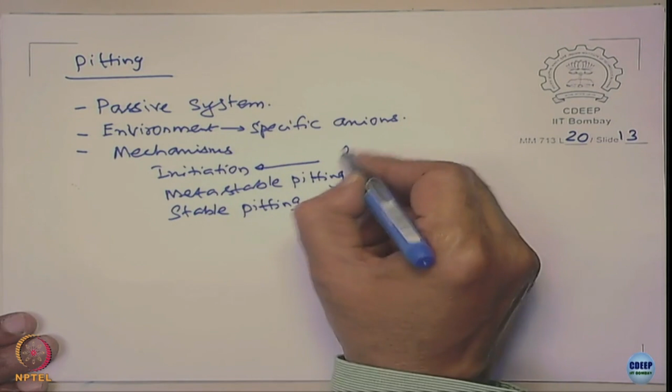Okay, we talked about the pitting mechanisms. We looked especially at initiation, then metastable pitting, then stable pitting. The initiation is governed by what? Film breakdown, am I right? Films start breaking down because of the anions present in the environment. Initiation mechanisms still are not well defined, still not 100% clarity is there.

I have looked at the metastable pitting. The film breakdown takes place, there is a localized damage at micron or submicron levels. How do you know a metal undergoes metastable pitting? If you look at the current oscillations, if you apply a potential in the passive region over the sample and you monitor the current, there is no stable current, there is always a fluctuation in the current. As you move the potential towards the pitting potentials, the fluctuation increases. These fluctuations indicate that there is a breakdown of the film, and then again healing of the surface by reforming the film.

And what is the criteria for a metastable pit turning into a stable pit? When does it become a stable pit? It's the pit chemistry. The pit chemistry is special. It has more H plus, it has more chloride, so it does not allow the metal to repassivate. So that is governed by what? Salt film, diffusion effects.

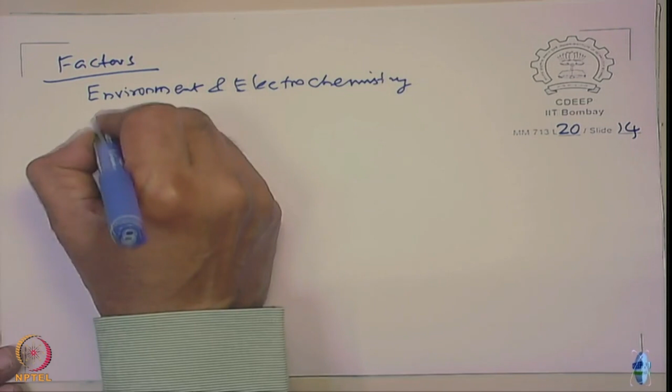Then we talked about the factors controlling the pitting corrosion. These are environment, electrochemistry, and metallurgy. We look at the temperature, the pH, and the velocity effect, for example. They have a very great influence. Electrochemistry means what? It is the potential. If you move the specimen towards the pitting potential, the film is going to break, and you are going to have higher damage to the passive films.

We also look at the metallurgy, mostly in relation to stainless steels, and how the various alloying elements affect the two parameters, pitting potential and repassivation potential. We saw the various alloying elements, and microstructures. They do significantly affect pitting corrosion. When I say microstructures, it could be all kinds of things. It can be segregation of various phases, and we talked about cold work.

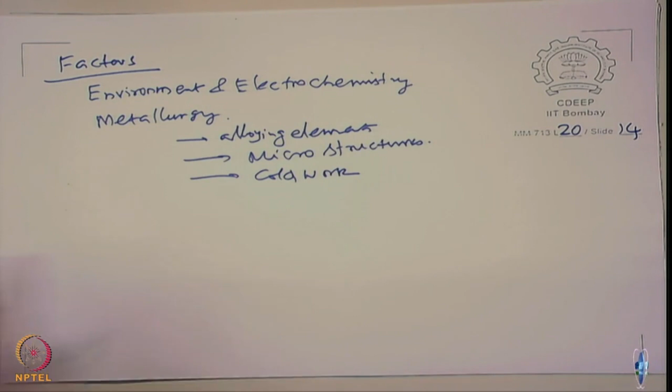I forgot to summarize, we also defined what a pit is, a pitting factor. It's not that any uneven corrosion can be defined as pitting. The ratio of the radius of the pit to the depth of the pit is very important. The radius should be smaller compared to the depth of the pit. Then only can the pit be stable.

Then we looked at the control measures. Then we looked at the test methods. You can add one more to this, and metallurgy is a surface state.

Any questions on pitting corrosion so far? If there are no questions, we will close the discussion on this topic of pitting corrosion.